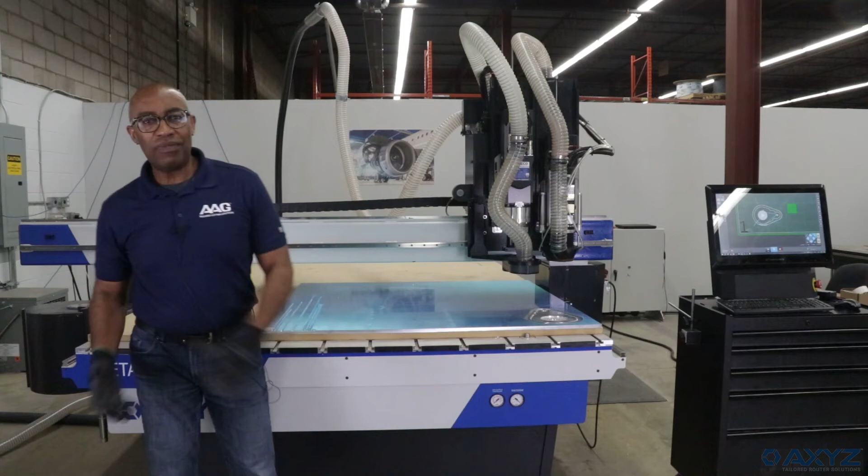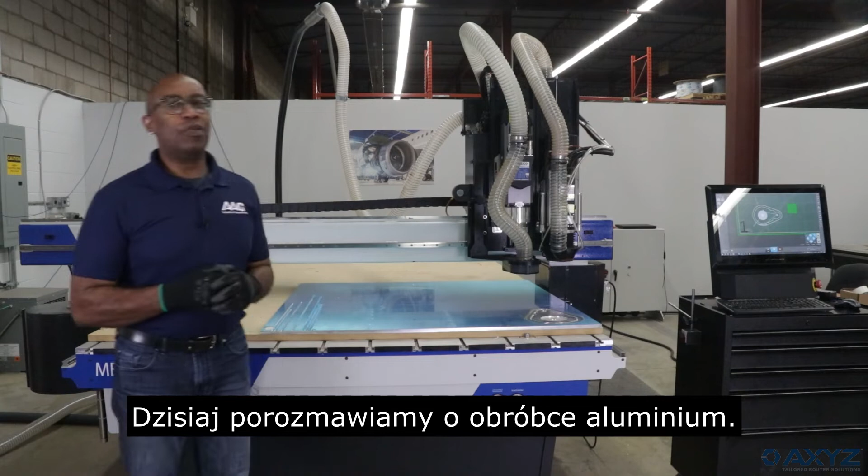Today we'll be talking about aluminum plate. When you're cutting aluminum plate, what are the things you need to consider in terms of tooling, vacuum tubes, chip collection, and how would you clamp or hold the material to the bed? We will be processing the material on our Metalworker platform. This is our newest machine, with a touchscreen system integrated into it. So we will look at how, when, and why you would do certain things when processing aluminum plate.

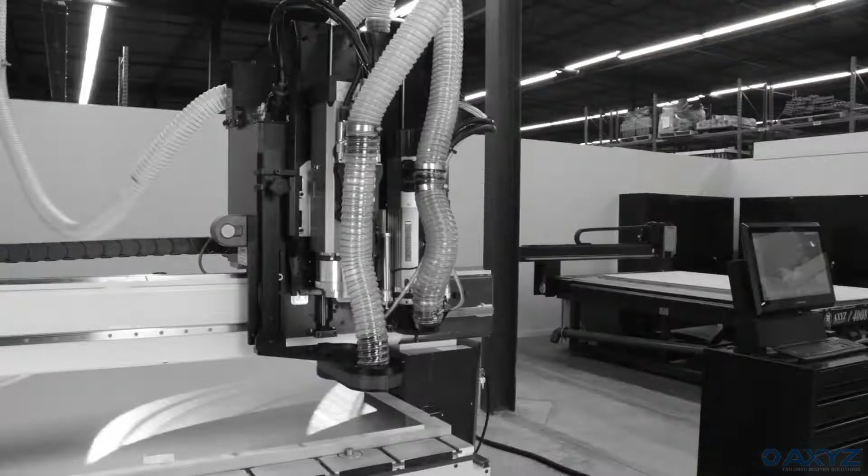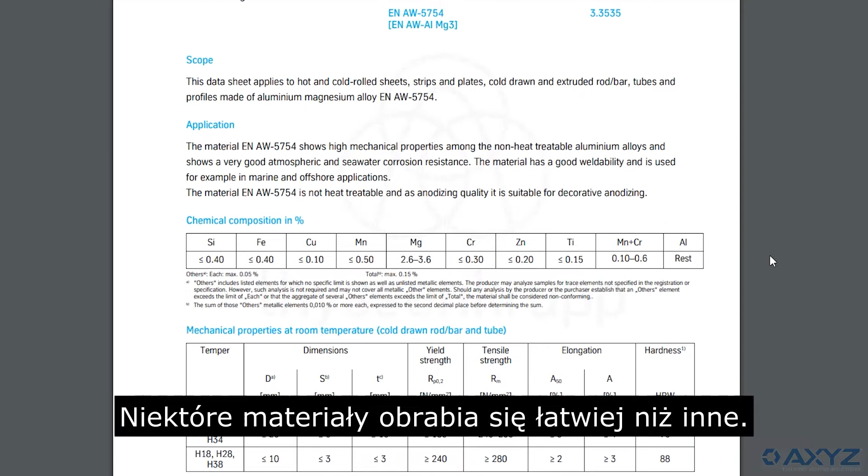What are the things I need to take into consideration? Well, the first thing, cutting any material, whether it be acrylic or aluminum, is the type or the grade. So I'm using 5052, 6061, 3000 grade, because all of those things will have an effect on my process. Some materials have a higher machinability level than others, so it may mean that I have to go with different RPM, different feed rates, more or less oil. So my first thing is, what's my grade?

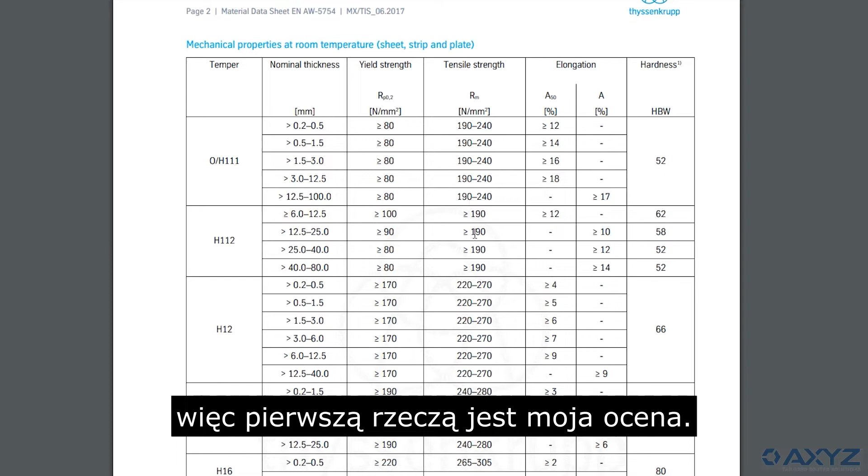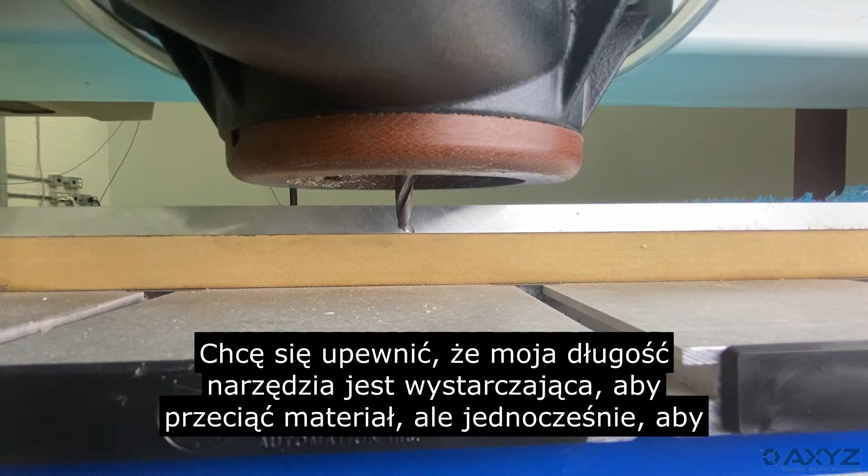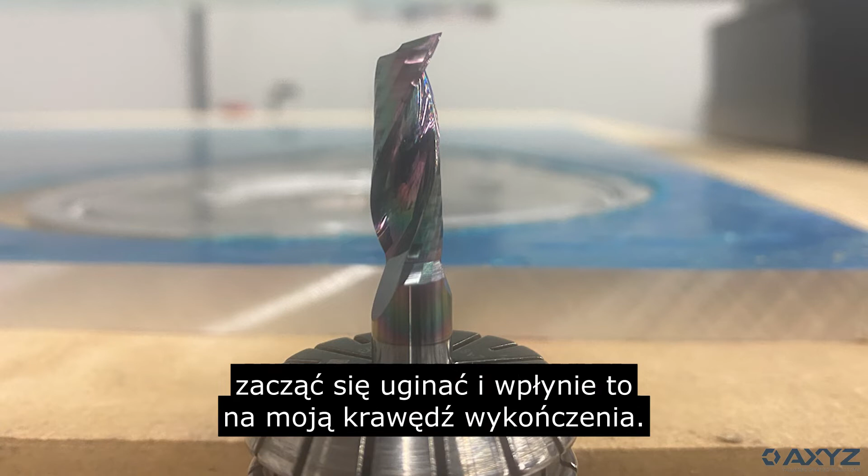Then I start looking at, what's my material thickness? What is the best tool I would need to use when cutting this material? When I look at material thickness, one of my main criteria is cut length. I want to make sure my cut length is long enough to cut through the material, but not so long that it affects the rigidity of the tool. Because if my tool is a lot longer than I need it to be, then I can start getting deflection in the tool. It will affect my edge finish, my feed rates. So I'm trying to maximize my setup.

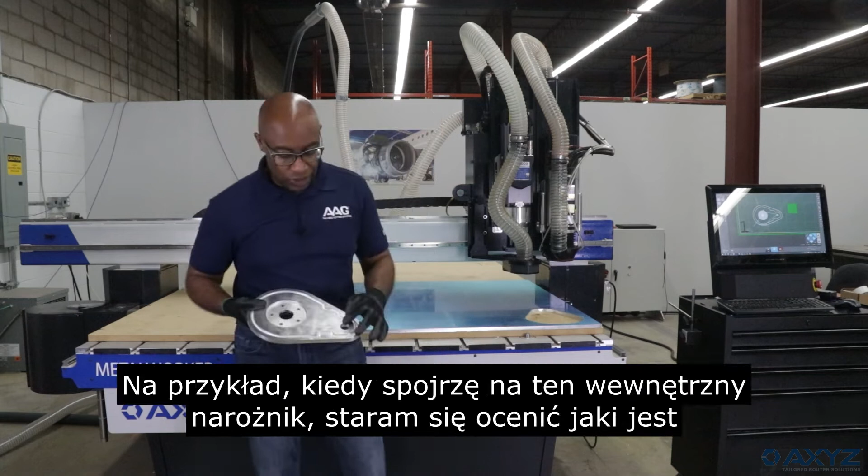So now I've figured out my grade, I've figured out my cut length. Now, next thing is my diameter. My diameter relates internally to internal shapes. For example, when I look at this internal corner, what is the maximum radius I can use in that corner? That will dictate the size of tool I want to have. Again, I want to maximize my tool size. The bigger the tool, the more aggressive I can cut, the more I can really control my edge quality. A smaller tool will affect my feed rates, and I have the higher possibility of tool breakage.

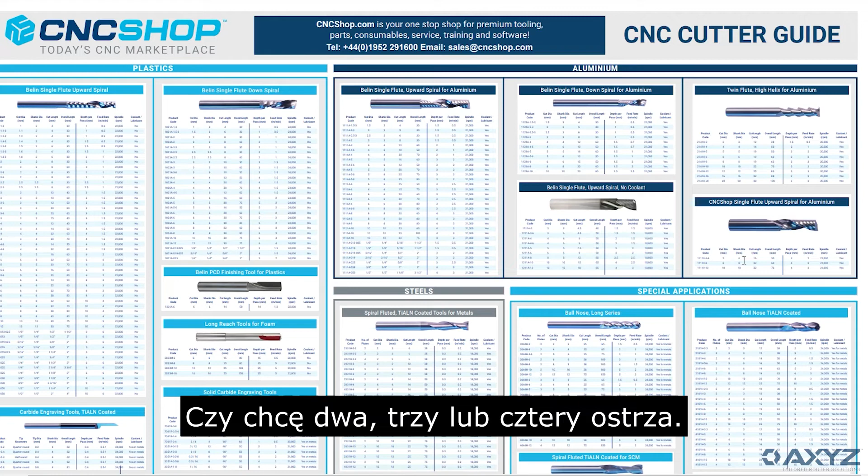So I've looked at grade, I've looked at cut length relative to material thickness, I've looked at tool diameter. Okay, great, so those are the primary things I'll look at first. So now I know the tool I'm going to pull. Well, the next aspect of the tool is tool geometry. Do I want a 2-flute, 3-flute, 4-flute? What do I want in terms of what I'm going to be doing?

I also have different coatings that I can basically look at. So when we pull a tool, we basically looked at all these different aspects, and then we get to tool geometry and whether we need coating or not. Now I've got my tool in hand. I know exactly what tool I'm going to use, the right cut length, the right diameter, coating. Now I start looking at the machine itself.

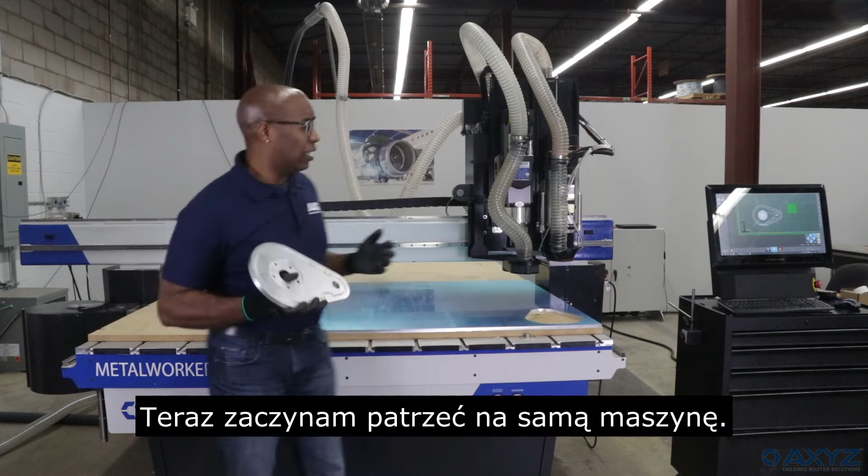Okay, how am I going to hold the material to the deck? Am I going to vacuum hold it down? Am I going to clamp it? Is it going to be in a fixture? All those different things have one thing in common. Doesn't matter if I'm vacuum holding it, clamping it, or holding it in a fixture, it has to be rigid. Rigidity is the name of the game, as they say. If my part isn't rigid, I will get chatter in my cut. I can get tool breakage. It will affect my finish, so I want to be sure that it's securely attached to the deck.

Okay, let's start looking at the machine itself. I need to be sure my machine is rigid in itself, so that when I place that material on it, there's no vibration in the machine, in the head, because all the vibration that I get when processing any material, especially something like an aluminum plate, ends up in the tool. And if it ends up in the tool, it ends up in my edge. So I want to be sure my machine is rigid, my material is rigidly held to the deck, so now I'm ready to go, okay?

Then I start looking at my tools I'll be using for cutting. I have different spindles, so we'll be using a 10 horsepower HSD spindle. We have a mister system attached to it, because we want to basically apply just enough coolant to the material and the tool where they engage. That will affect my edge quality, and it will affect how fast I can cut.

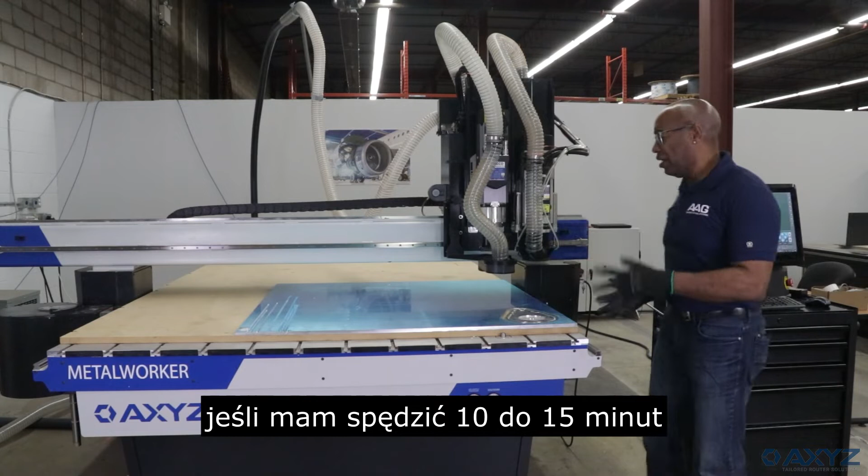And the last aspect of that is my chip collection. Chip collection, again, the chips are being removed, and you're drawing the heat away from the cut. It also affects your cycle time in terms of processing sheets. If I have to basically spend 10-15 minutes cleaning up between sheets, that will actually increase my cycle time in terms of parts per minute or parts per hour. So when we configure this machine, we've looked at all the aspects right up to the point where we're even looking at how well we collect the chips before we even start cutting.

Now we're ready to go. Next, we're going to take the file and move it into our CAM software. Within our CAM software, I'll take all of those things into consideration.

I know my material thickness. I know my smallest inside radius, so I know what tool I'm going to pick. I know what kind of edge quality I want, so I know what kind of feeds and speeds I'm going to look at. I might also decide at that point I want to do multipass.

Multipass might seem like it takes longer, but actually it tends to be quicker. With one pass, depending on the tool size, I may go a lot slower because I cannot be as aggressive, since I'm taking a lot more material off. With multipass, I can go a lot quicker because I'm taking smaller bites.

The downside of doing a multipass cut is I might see step marks. What we'll do in that case is look at doing a cleanup. That cleanup will basically go around in one pass, taking off 10, 15 thousandths of an inch. That will now give me that nice, beautiful edge I'm looking for.

Once I've sat down and looked at all those things in my CAM software, I'm ready to cut to a certain point. I need to look at, if I'm doing a nested job, what's my sequence? What is the cut order I will be using to cut the parts? I don't want to be cutting and jumping from shape to shape and not being efficient in my process. So I will pick a sequence that's very efficient so I can basically reduce my cycle time.

Now we'll take a quick look at the part we're cutting in regards to how it was set up. You can see the basic shape on the screen, and to the right you'll see the different layers I'm using. One of the things we've done is assigned tool paths to layers, which makes the process quite easy to duplicate if I had to do this process again.

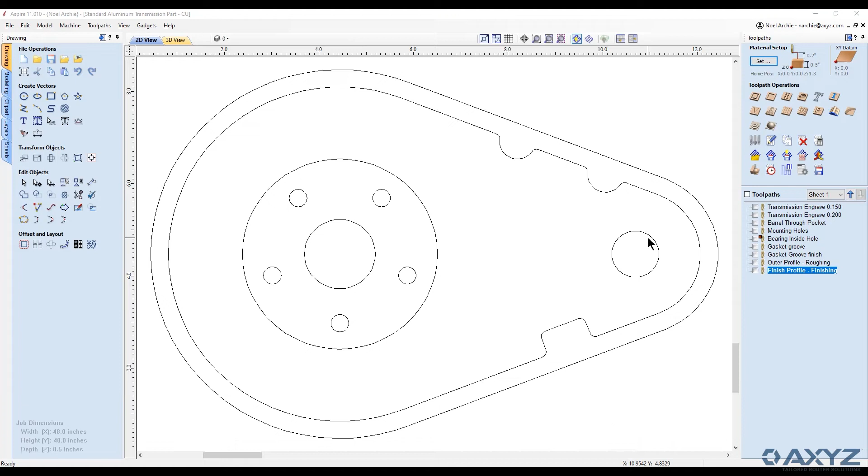If I look at this particular layer, you can see it automatically picks the shape I want to apply the tool path to. I can designate the tool, and I can designate all my parameters in terms of feeds and speeds required for that tool. Plus, if I need to do things like ramps or tabs, it can all be added in at this point.

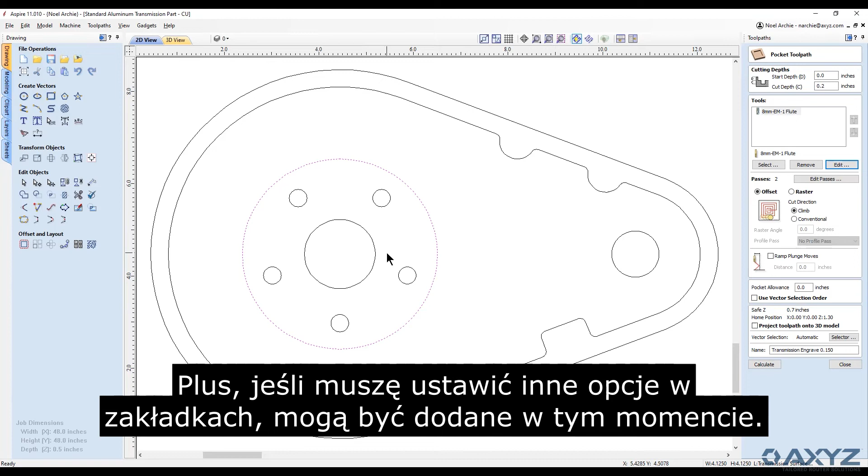Once I am finished, I simply hit calculate. Then it will show me the tool path. I can simulate it so I can see exactly what that will look like. I'm just simulating the whole job.

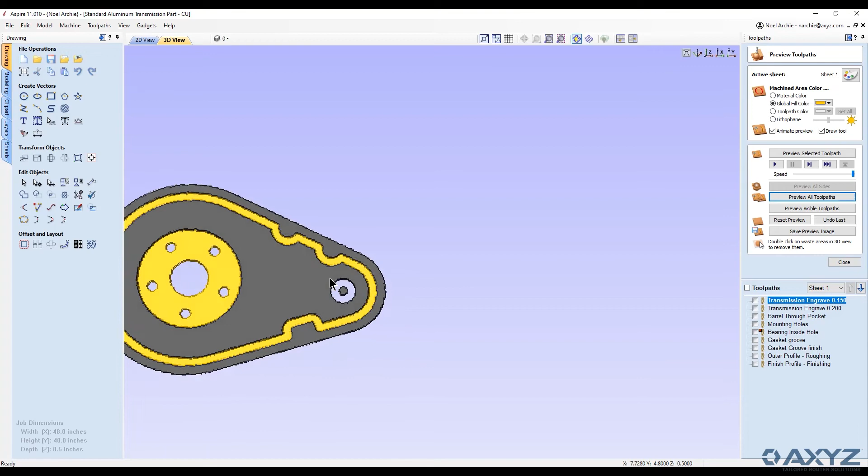If I double click on the scrap, it shows me the finished part, so I can now zoom up on it and move it around to see what it looks like.

Okay, so I'm going to go back to the 2D view for a second. As I said, I have the one particular toolpath selected, automatically selecting the geometry. If I want to go in now and calculate all my different toolpaths, I'll simply hit calculate all.

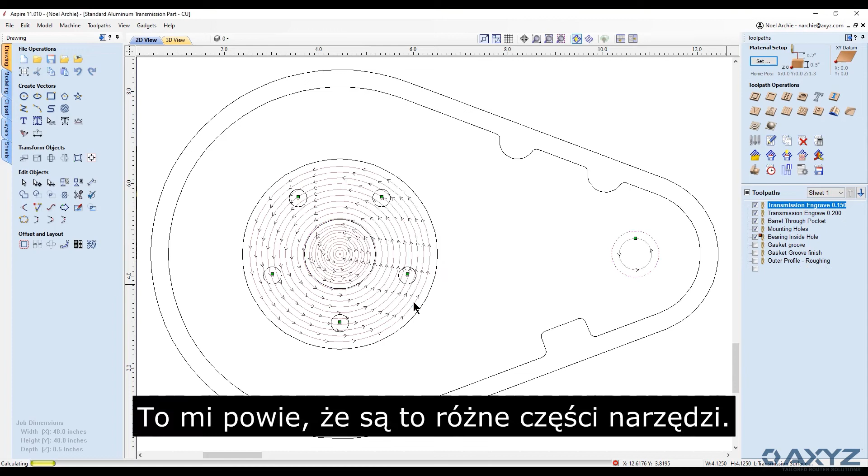It will tell me these are the different toolpaths, and show me what the profile or the motion would look like for each one. If I want to see the actual tool diameter, I simply click on that icon, and now it shows me exactly what that tool will do in terms of following the path.

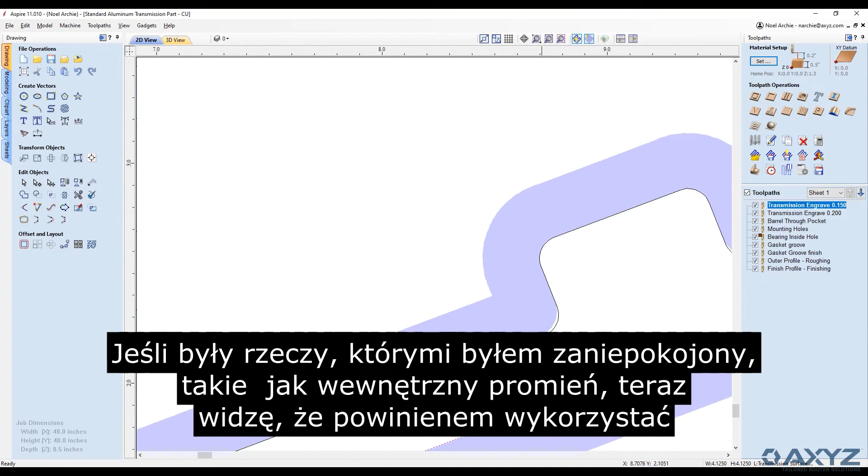If there were things I wanted to be concerned with, like inside radiuses, I can now see that maybe I need to use a smaller tool to get a tighter inside radius, because the tool I'm using might be too large. So I can address those things now before I get to the machine.

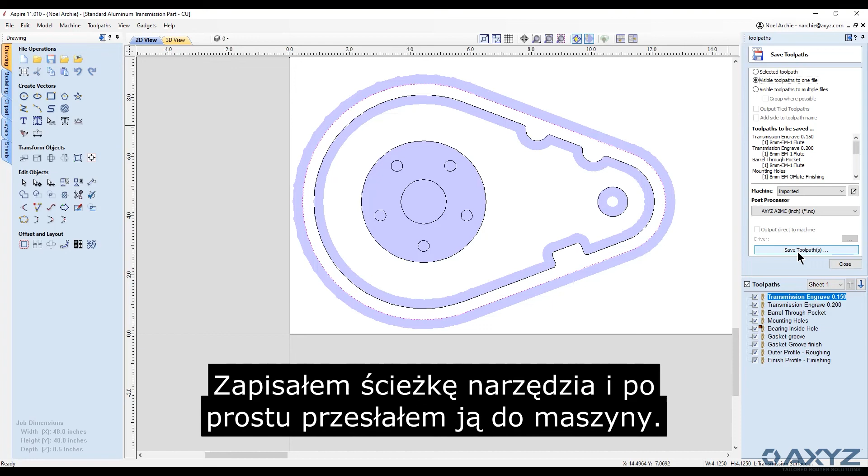Once that is finished, I will simply save the job. It will show me all the different tools being used in that job, so I can verify that those tools have been loaded up in my tool changer. I save the toolpath and simply transmit it to the machine. That's basically the process for getting the file ready to run.